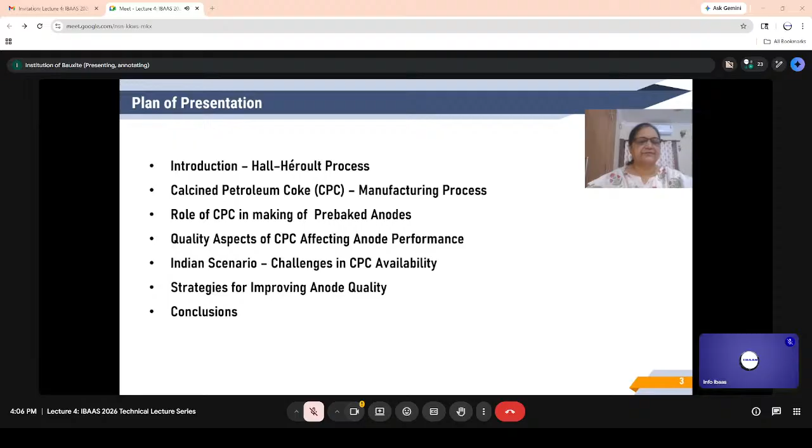As we all know, aluminium is produced through the Hall-Héroult process, where alumina is electrolytically reduced in molten cryolite. During this process, oxygen is released at the carbon anode and reacts with carbon to form carbon dioxide, while molten aluminium is deposited at the cathode.

The carbon anode plays a dual role. It acts as a current conductor and is continuously consumed during electrolysis.

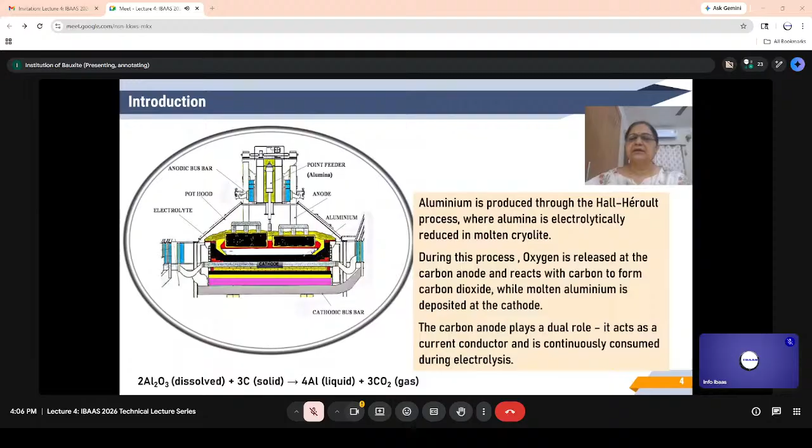Now, coming to the raw materials for pre-baked anodes, calcined petroleum coke or CPC is the most important raw material in anode production, contributing nearly 65% of the composition. The rest are coal tar pitch and recycled butts.

Properties of CPC directly influence anode quality and ultimately smelter performance. However, in recent years, CPC quality has been changing due to increased use of lower cost, high sulfur crude and the growing demand for aluminium.

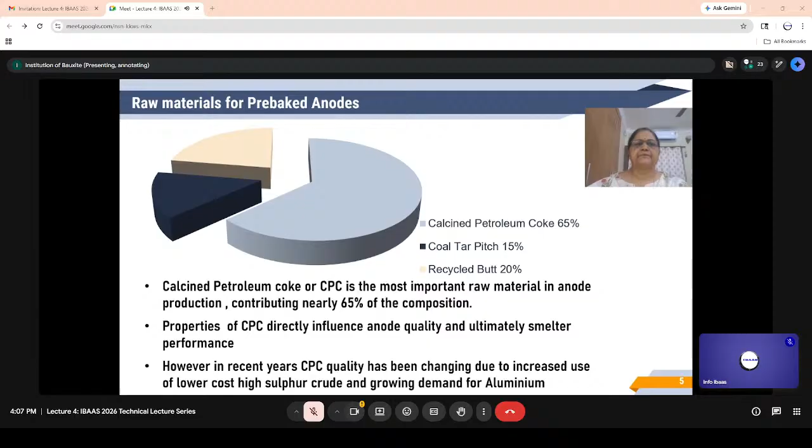Before we enter into the actual subject, I thought it's extremely important that we talk about the journey of calcined petroleum coke from a petroleum refinery.

Where it is not very much wanted, till it reaches the aluminium industry, where it becomes the most wanted, most needed raw material for anode making.

So the CPC starts its journey from the crude oil refining unit, where the residue is sent to a delayed coker.

This delayed coker produces RPC, that is raw petroleum coke, and this raw petroleum coke goes to a calciner, where you get calcined petroleum coke, which ultimately becomes the raw material for the aluminium industry.

And if we take around say 1 ton of crude oil for processing, we get around 40 kg of CPC for the aluminium industry.

The quality of this calcined petroleum coke is affected by choice of crude, initial refinery process steps, coking and calcining processes, and handling systems between the refinery, calciner, and final customer.

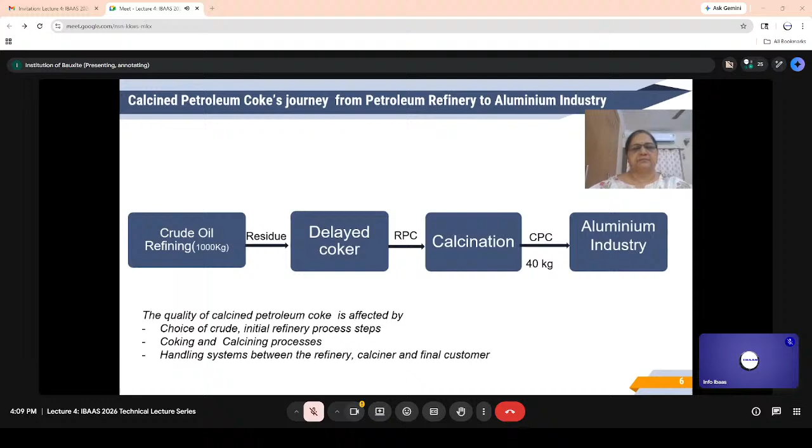So coming to the refining process, as we all know, the crude oil is refined by distillation processes, atmospheric and vacuum distillation, to give us valuable products which are of interest to the refiners.

These are of commercial application, that is gasoline, naphtha, kerosene, diesel fuel, and gas oil.

And the residue which is left out goes to the delayed coker, becoming the feedstock for the delayed coker, from where we get RPC. So the chemical properties of RPC, such as sulfur and metals, are directly related to crude oil quality.

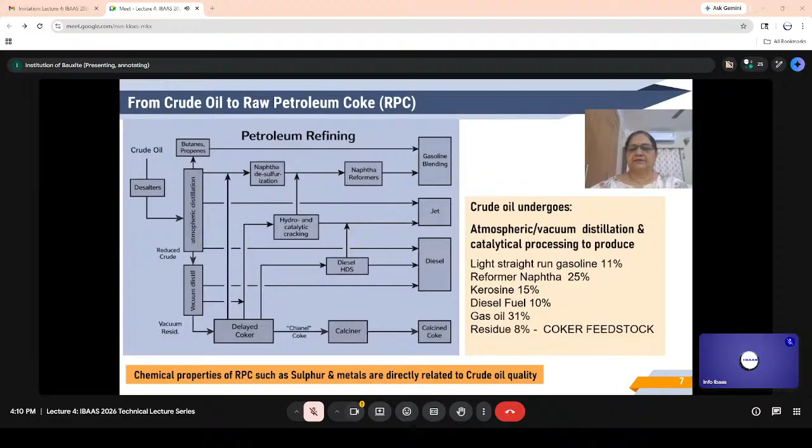Looking at the delayed coker, it converts low value residual oils into higher value lighter products. Final carbonization occurs in coke drums at higher temperature and pressure. The physical properties of RPC, such as volatile matter and moisture, are related to the operating variables of the delayed coker.

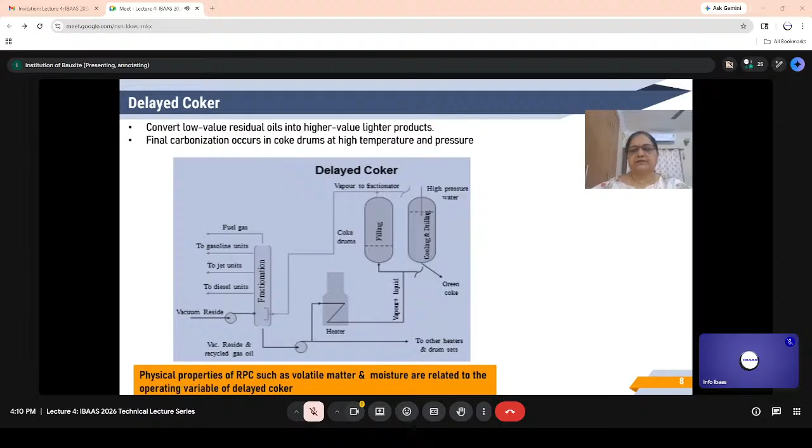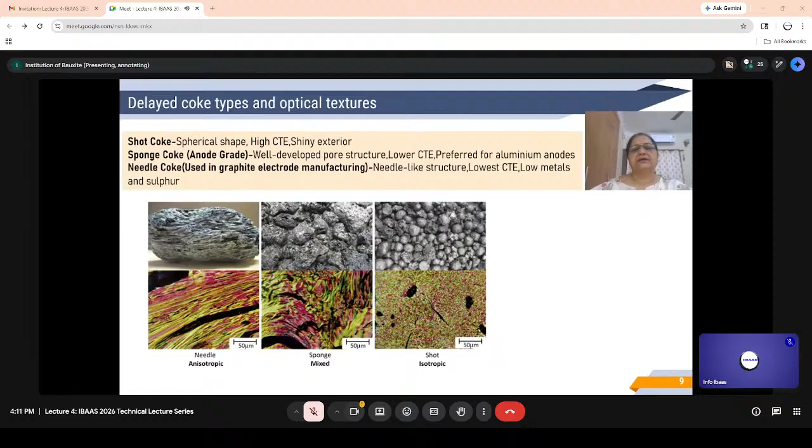We get three products out of the delayed coker. That is shot coke, which has high CTE and shiny exterior and is spherical in shape. We have sponge coke, that is anode grade coke. It has a well developed pore structure, lower CTE (coefficient of thermal expansion), and is preferred for aluminium anodes. Then needle coke, which goes for graphite electrode manufacturing. It has a needle-like structure, lowest CTE, and low metals and sulfur.

Now coming to the calcination process, where RPC is converted to CPC. This is a thermal treatment process at very high temperature, say 1250 degrees centigrade, where moisture and volatile matter are removed by heating. This increases the electrical conductivity and density of the RPC, making it more oxidation resistant and suitable for anode making. The calcination operation has a significant influence on CP coke quality. Cokes with substantially different volatile contents, both in quality and quantity, and different impurity levels should be calcined under different conditions. The methods of calcination are rotary kiln, which is most widely used, rotary hearth furnace, and vertical shaft kiln.

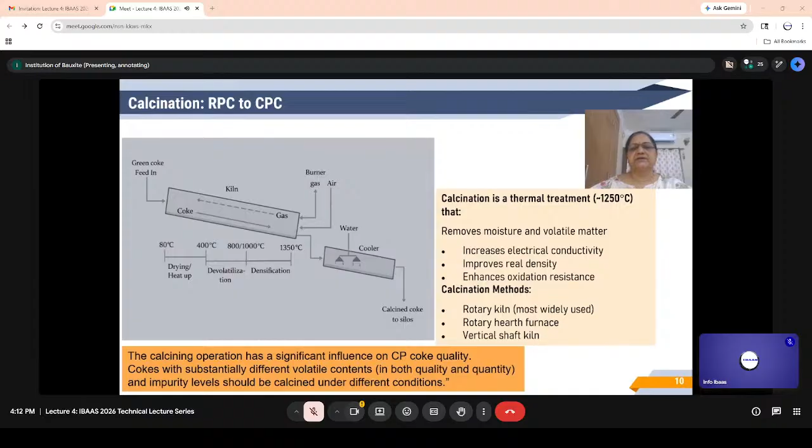When RPC converts to CPC, moisture gets removed, volatile matter gets removed, ash increases, and fixed carbon increases. Impurities change as per the operating variables of the calciner and the equipment. The real density and bulk density improve to higher values, the strength improves, and the apparent density also increases.

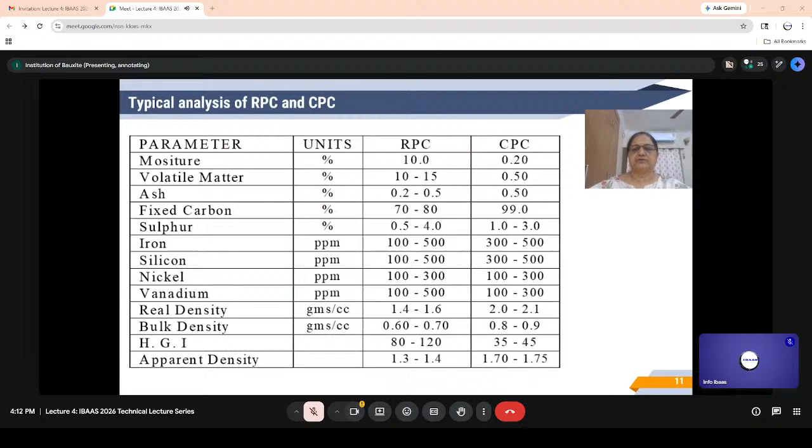Now the CP coke enters the carbon plant of the smelter plant, from where we make anodes. There are three stages of production of anodes: the green anode plant, the baked anode plant, and then the rodded anode shop.

I'll just briefly give you the process. The coke, upon reaching the carbon plant, is graded into different fractions, crushed and ground into fines to give the desired fractions of coarse, medium, and fines. It is also mixed with crushed spent anode butts, which come out from the electrolysis cell after consumption of the anodes. Then the dry aggregate is preheated and mixed with coal tar pitch at a particular temperature, say 150 to 170 degrees centigrade.

It is formed into green anodes, and then baked very slowly for a period of say 14 days, during which the pitch gets carbonized and reaches a temperature of 1050 to 1120 degrees centigrade. Now the baked anodes become suitable for the electrolytic operation, and then they are rodded and sent to the pot line.

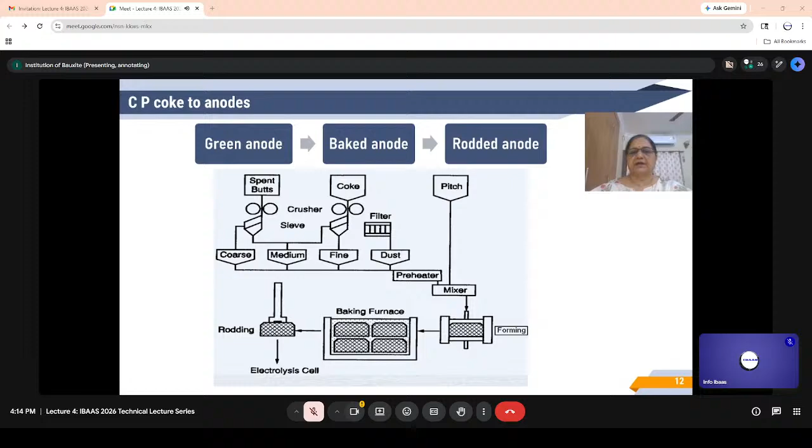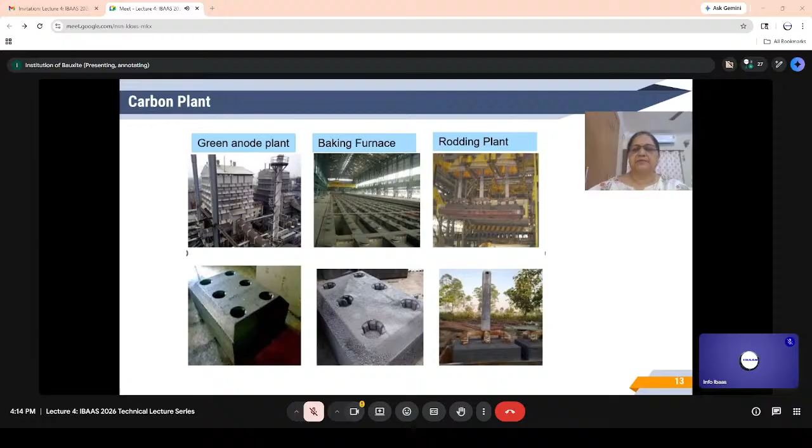In this slide, I've shown the picture of all three stages of anode making. Of course, this picture is from NALCO, so it will be different for different aluminium plants and aluminium smelter plants.

As we are talking about the anodes, it's also important to understand the anode consumption mechanism. From the overall reaction we all know, if we calculate the theoretical consumption of carbon from this equation by stoichiometry, it comes to around 334 kg of carbon to be consumed per ton of aluminium production. However, this value is always on the higher side, due first to current efficiency always being less than 100%, and also losses due to excess reactivities, dusting, breakages, etc. So we get a figure higher than 400, to 420 or 430 kg of carbon per ton of aluminium.

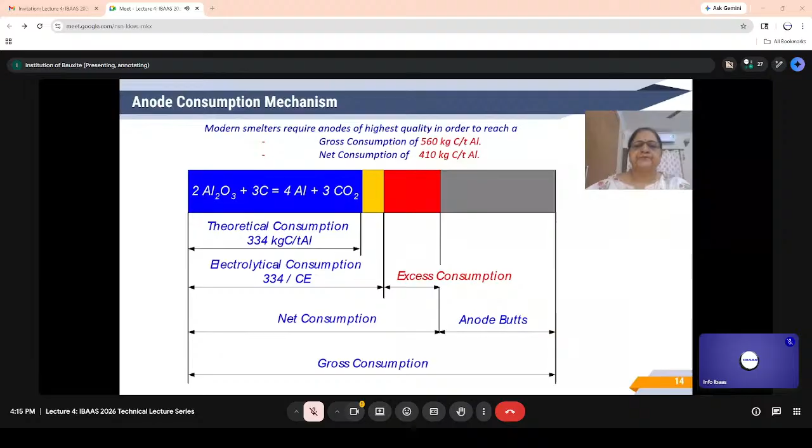If we look at the schematic mechanism, taking a single anode to see how this carbon gets consumed, this is due to electrochemical formation of CO2 from the overall reaction, and the formation of carbon monoxide due to a back reaction.

There is also air reactivity, which happens at the top of the anode at around 400 to 450 degrees centigrade, where oxygen from the air reacts with carbon to form carbon dioxide. And there is a back reaction from the carbon dioxide gas underneath the anode, again reacting with carbon to form carbon monoxide—that is called carboxy reactivity or CO2 reactivity. There is also preferential oxidation of the binder, and dusting also takes place inside the pot.

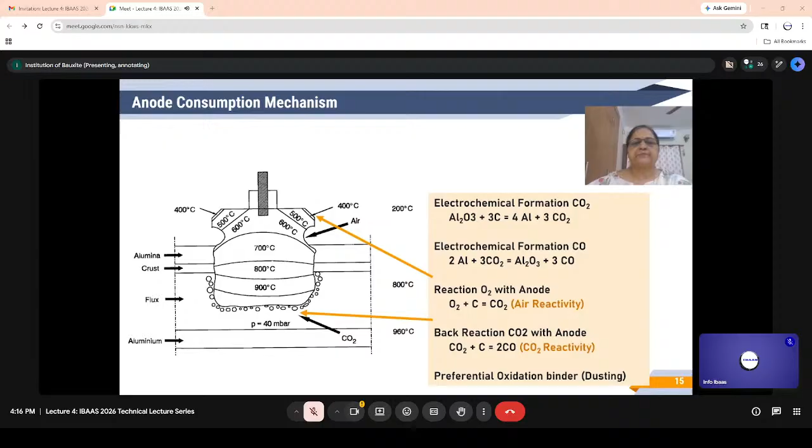So what do we look for in pre-baked anodes, what are the critical properties? These are high apparent density, high mechanical strength, low electrical resistivity, high thermal shock resistance, low chemical reactivity, and high chemical purity.

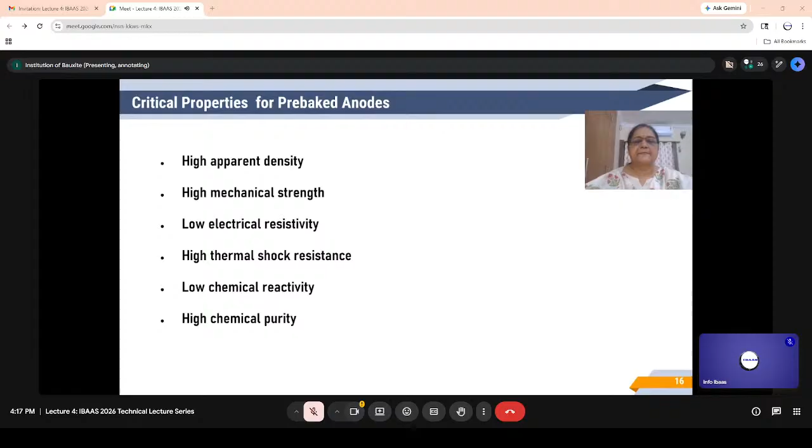These anodes are tested for specific properties, which gives us an idea of what kind of anodes we are using in the pots. This tells us about the apparent density, specific electrical resistance, flexural strength, compressive strength, coefficient of thermal expansion, fracture energy, thermal conductivity, real density, air permeability, and reactivity figures along with the impurities.

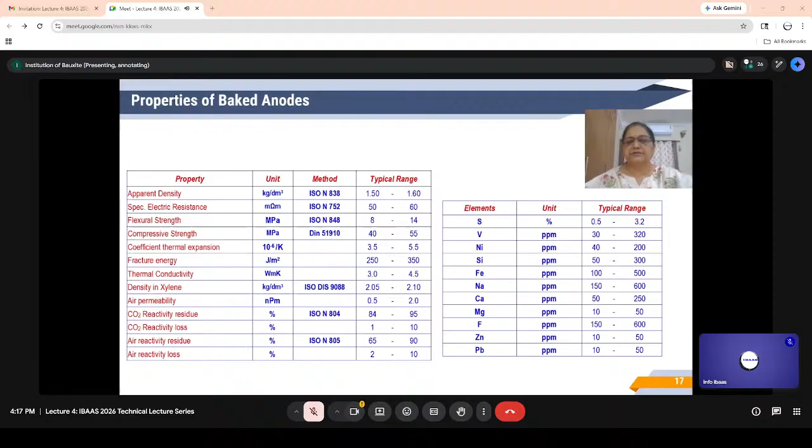Also, I wanted to share with you one theoretical equation of carbon consumption, where these anode properties are related to the net carbon consumption, along with some parameters like current efficiency and cell design, one cell factor depending on the design of the pots and bath temperature of the pot.

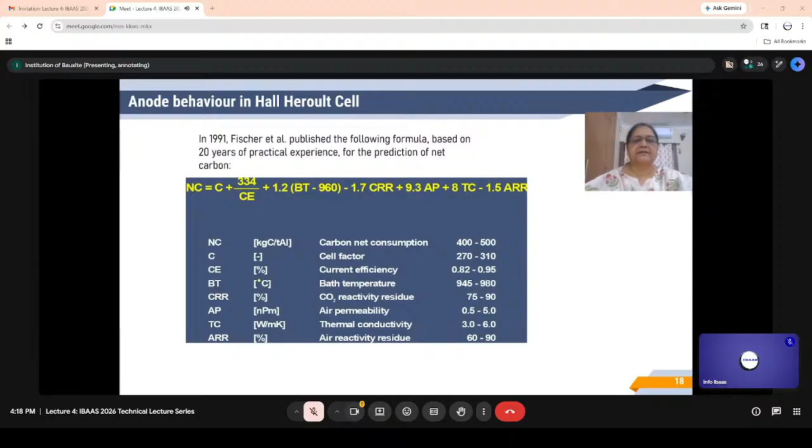Let us have a look at the quality aspects of calcined petroleum coke and their impact on anode quality. The properties tested for CPC are apparent density, real density, impurities, and reactivity figures. The apparent density affects the bulk density of anodes, and anode cycle is decided based on the baked anode density.

Real density indicates the calcination level of CPC, and baking level in anode making is adjusted accordingly. Sulfur affects the net carbon consumption and reactivity figures, and baking levels are adjusted for desulfurization. It also has environmental impact.

The impurities - iron, silicon, vanadium, nickel - all these lead to metal contamination, and especially vanadium leads to air reactivity. Sodium and calcium affect the reactivity figures. Size and grain stability are important as far as the structure of the anode is concerned.

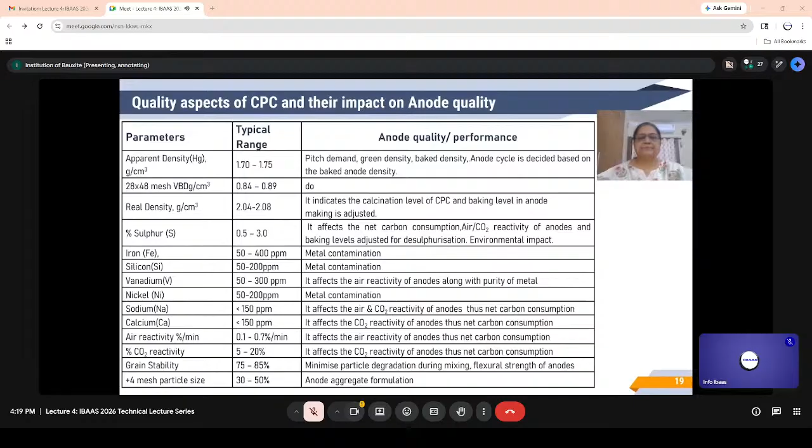So why and how is coke quality changing? Refineries on average are running more lower cost, high sulfur and heavier sour crudes, which directly impact coke quality. A significant increase in aluminium production and demand for coke is not being matched by growth in traditional quality anode grade cokes.

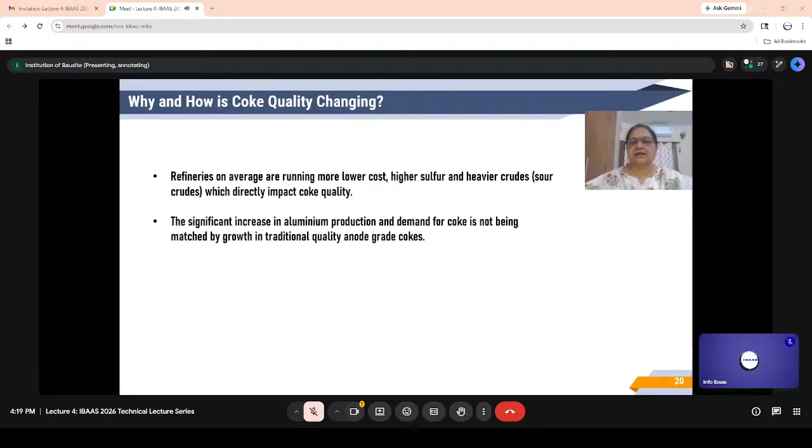If we look at the Indian scenario, today the aluminum capacity in India is 4.1 million tons. It is projected to be 8 million tons, so the CPC requirement is going to double from the current 1.3 million tons to 2.6 million tons. But the challenges are limited availability of low sulfur RPC - only 5 out of 23 refineries produce anode grade RPC, so there's a domestic supply gap.

The above figures may not be up to date, it's an old slide.

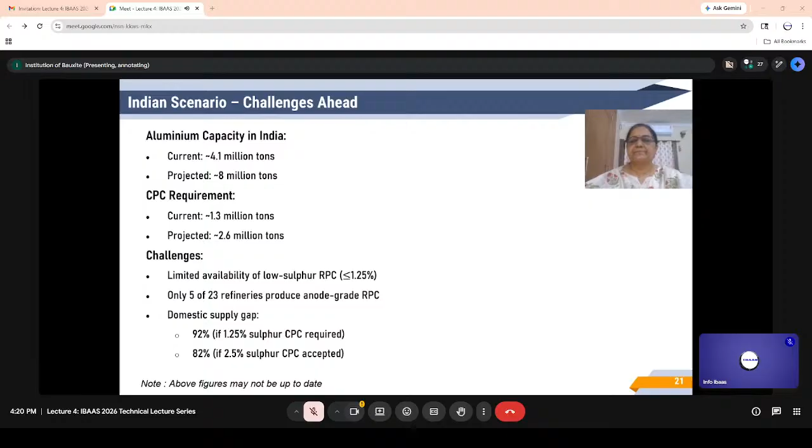Now let us see the changes seen in CPC quality and the impact on anode quality and smelter performance. There are four risks which I'll be explaining. First is decrease in coke density due to crude changes and higher volatile matters. Cokes with more isotropic structure may be used, while shot cokes may be blended. Increased impurity levels, particularly vanadium, and sulfur levels of high sulfur cokes used in blends will increase. In the next slides, I'll explain each of these risks in detail and what are the impacts on anode quality.

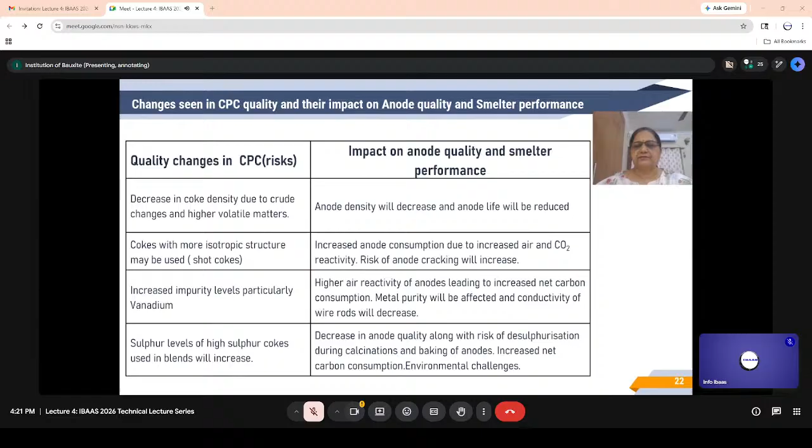First, let us have a look at the coke bulk density. If it decreases, it has a direct impact on bulk anode density. Anode shift life is going to be affected, increasing anode production cost. Air permeability of anodes will increase, leading to increased carbon consumption, and specific electrical resistance will also increase, leading to increased power consumption.

Here I have shown a few graphs where you can see the bulk density of cokes is directly related to the apparent density of anodes, and also if the bulk density decreases, the air permeability of anodes also increases.

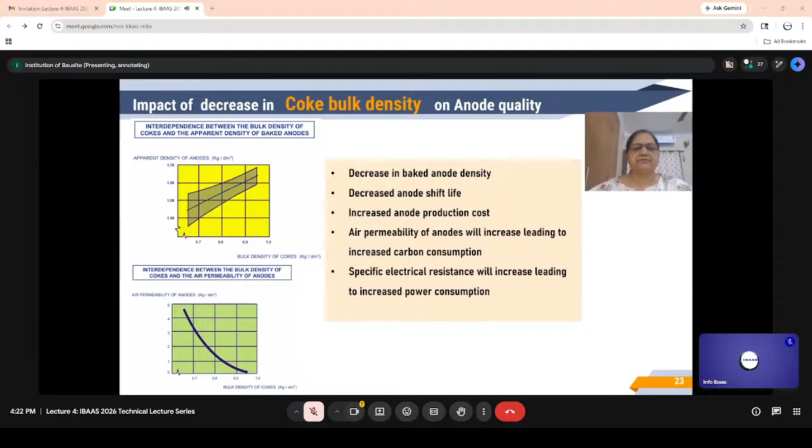The presence of shot cokes in CP coke matrix will lead to production of anodes with higher CT values and lower flexural strength, and possibility of development of anode cracks during electrolysis.

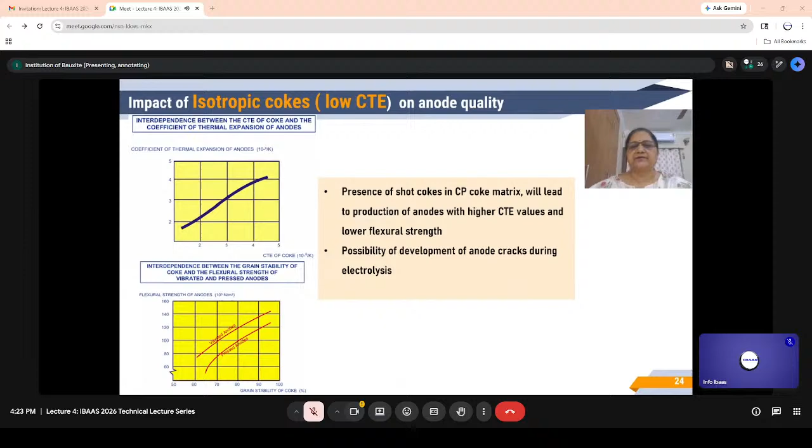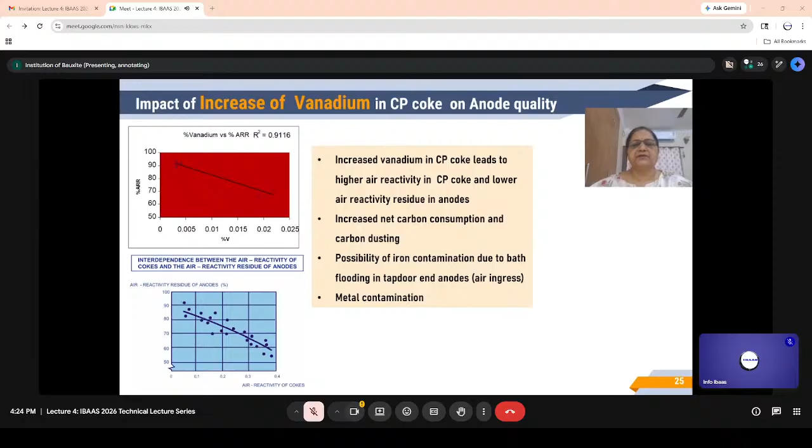Now let us see the impact of increase of sulfur in CP coke on anode quality. Increased sulfur leads to increased net carbon consumption due to net loss of sulfur. As you can see from these graphs, anodes made out of high sulfur coke start desulfurization at around 1100 degrees centigrade.

So desulfurization leads to increased air reactivity, increased permeability, and increased net carbon consumption. It also poses environmental challenges in terms of emission of SO2 gas. The only positive thing we notice is the CO2 reactivity residue shows better results when the sulfur is on the higher side in CP coke. But again, the effect of recycled sulfur on electrolytic bath and current efficiency needs to be assessed.

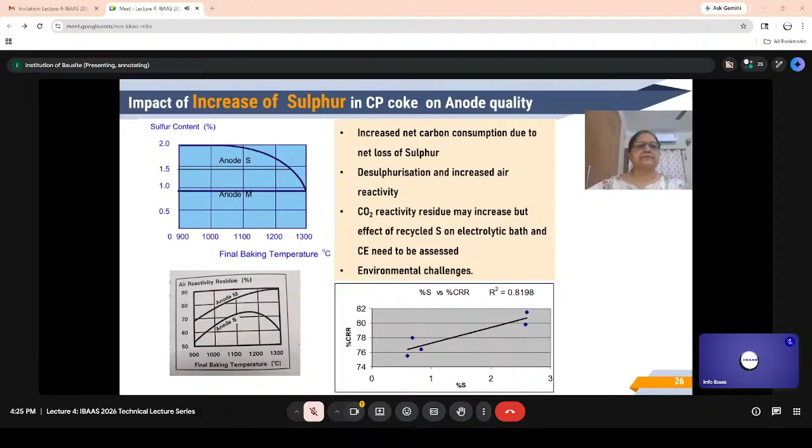The impact of increase of sulfur in CP coke on anode consumption and current efficiency has been studied in detail, and it has been published in a recent publication in 2023. The results show that when the sulfur content in anodes increases, the carbon consumption also increases, and the current efficiency gets affected, showing a downturn when sulfur in anodes is on the higher side.

So the results have shown that current efficiency lowers by around 1.3% per 1 weight percent of sulfur, and carbon consumption increases by 6.1% per 1 weight percent of sulfur for pre-baked anodes.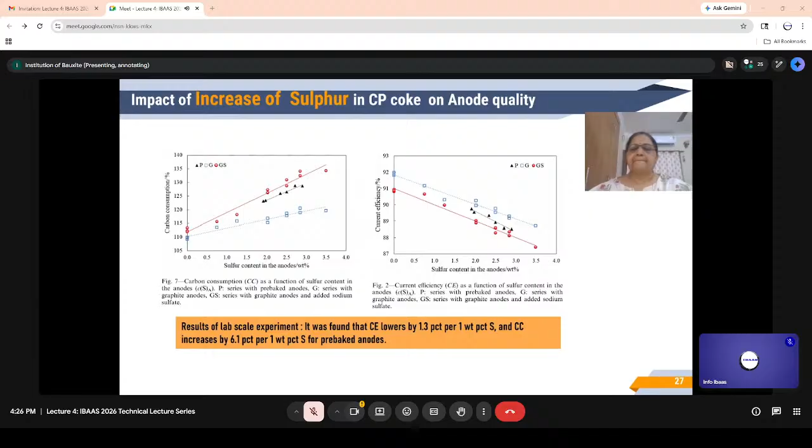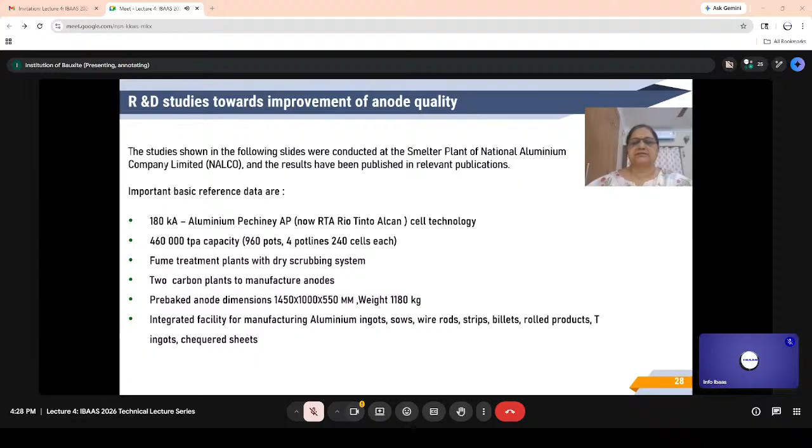The CP coke taken for the R&D studies was mainly of two types: one of higher density with lower impurities, and another of lower density with higher metallics, higher sulfur, and also higher reactivity.

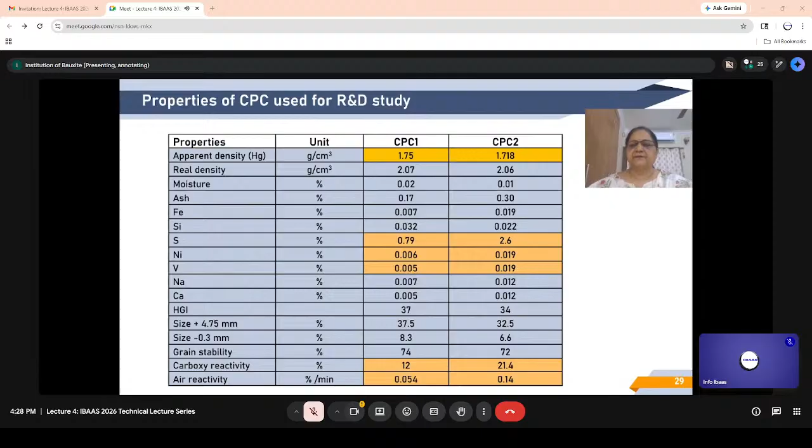The first experiment carried out was to see the effect of blending on the resultant anode quality. We blended 30 to 40% of the premium, higher grade coke, all fractions, with the lower grade coke, and anodes were made. All these experiments were carried out in R&D carbon bench scale equipment supplied by R&D Carbon Switzerland. These bench scale experiments showed considerable improvement in anode density, green density, and bake density of the blended anodes.

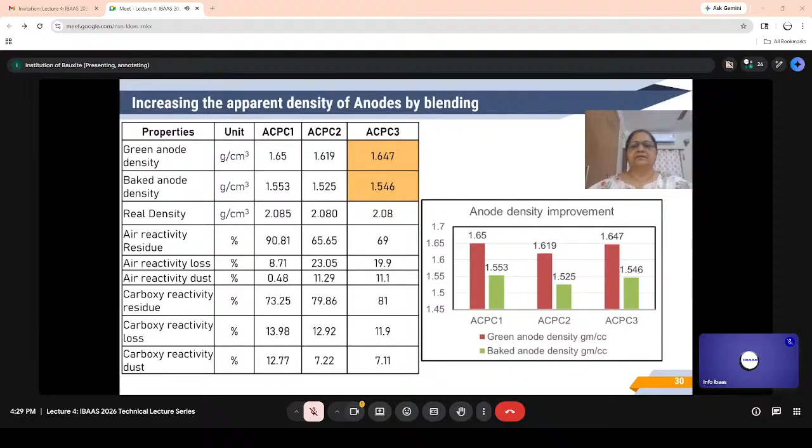The second experiment was to see how to improve the reactivity figures. This is difficult to implement in the plant with the present setup, but we still tried to see if the whole fines fraction could be made from the premium grade coke, with the other fractions being of the lower density coke. Because the fines fraction is the most reactive part of the dry aggregate, using premium grade fines in place of lower grade coke had the expected effect.

The reactivity residue increased from 65 to 85%, and CO2 reactivity also increased from 79 to 84%.

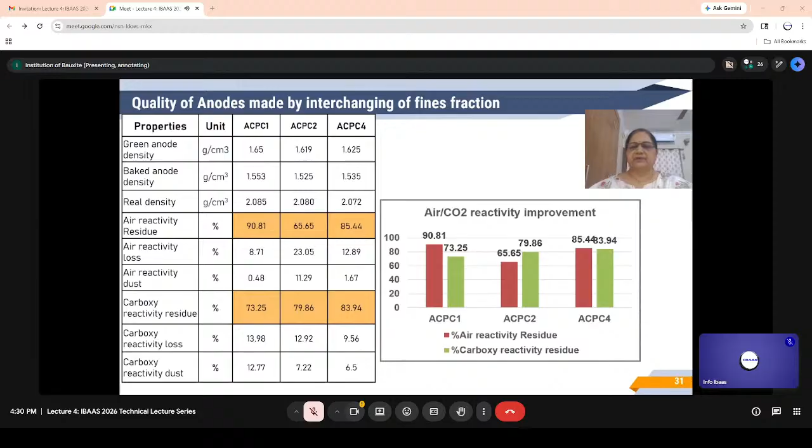The next experiment was carried out again with respect to fines. Minus 200 mesh was operated at 68 to 70%, and that was increased to around 80%. Accordingly, the Blaine number was measured and found to increase from 3500 to 4400. As you can see, as you increase the Blaine number, it also increases the green density and baked anode density.

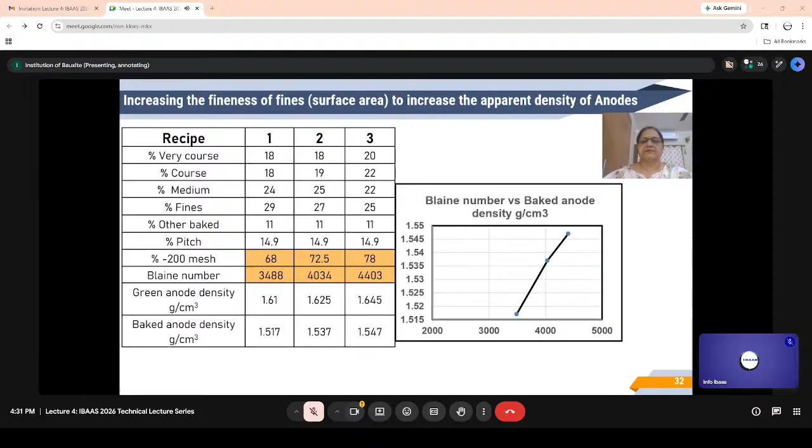The mixing temperature was also increased in the bench scale plant experiments. We tried to make anodes at different mixing temperatures, and we could see that the higher the mixing temperature, the better the density of anodes. This is natural because the pitch is able to ingress into all the pores of the coke, giving a very good structure in terms of density.

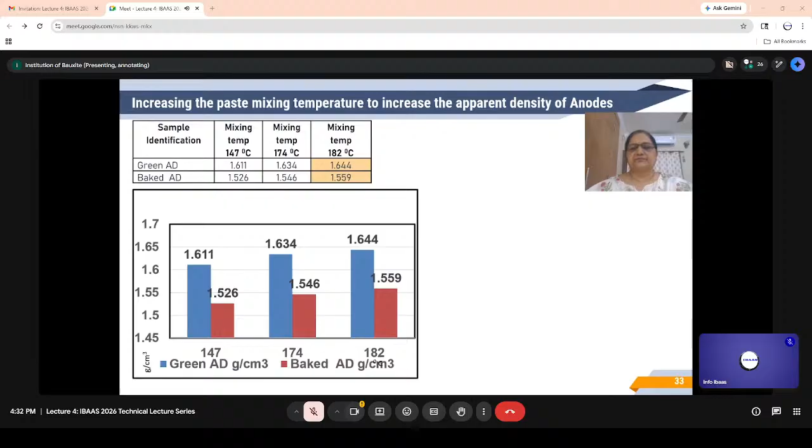Then, to mitigate the effect of reactivity issues, mainly attacking the air reactivity of anodes, we did extensive studies trying various additives to see their effect on decreasing air reactivity losses. We found that boric acid is one of the inhibitors which gave very satisfactory results in lab scale, pilot scale, and limited plant scale trials.

We then implemented this in the whole plant, and now in both carbon plants this process is already in use and in operation. The air reactivity residue before addition of boric acid used to be around 62 to 63%, and after we started adding it, it has come to more than 85%, so the air reactivity dust is decreased. Of course, when adding boric acid, there has to be some increase in boron content, so that needs to be monitored. There was no effect on average metal purity.

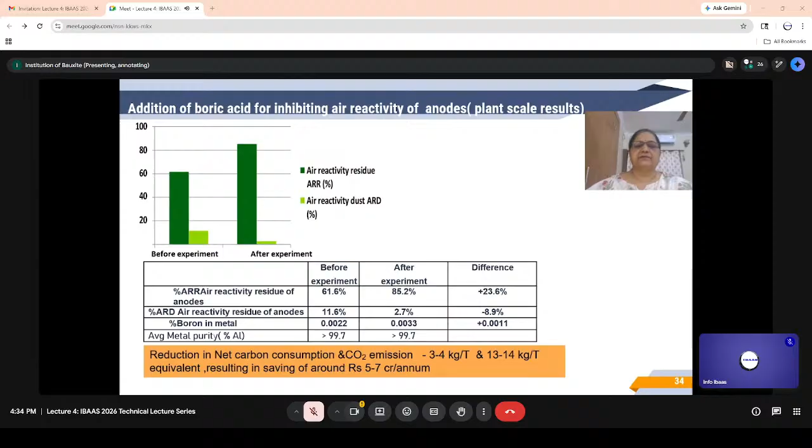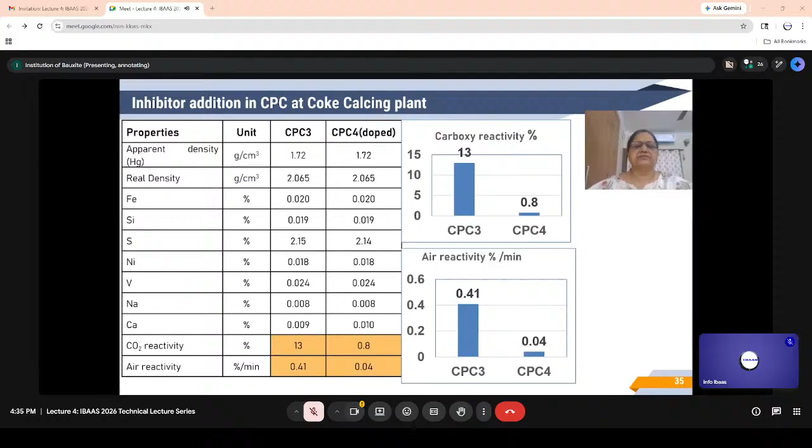Another experiment was carried out at the CP coke calcining plant, where we added this boric acid powder at the discharge end of the CP coke while it was still in hot condition. We just mixed it physically and took out that coke. When we analyzed the CO2 reactivity and air reactivity, they had decreased to a considerable extent. This coke was again used for bench scale experiments to make anodes and find out the effect on the reactivity figures of the anodes, and there was considerable improvement in air reactivity residue and CO2 reactivity residue.

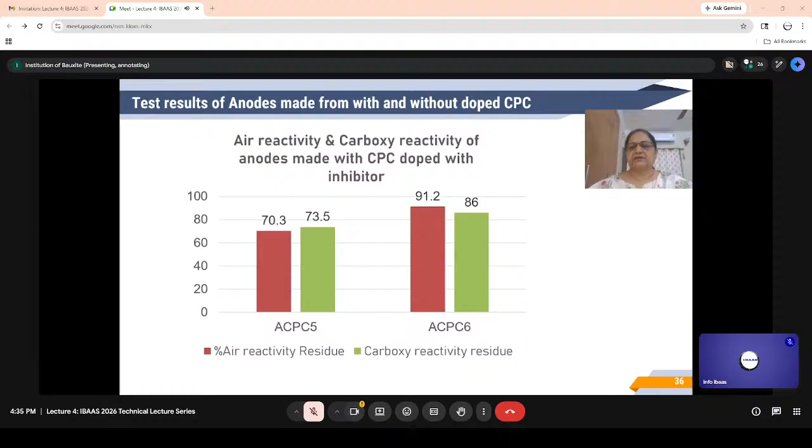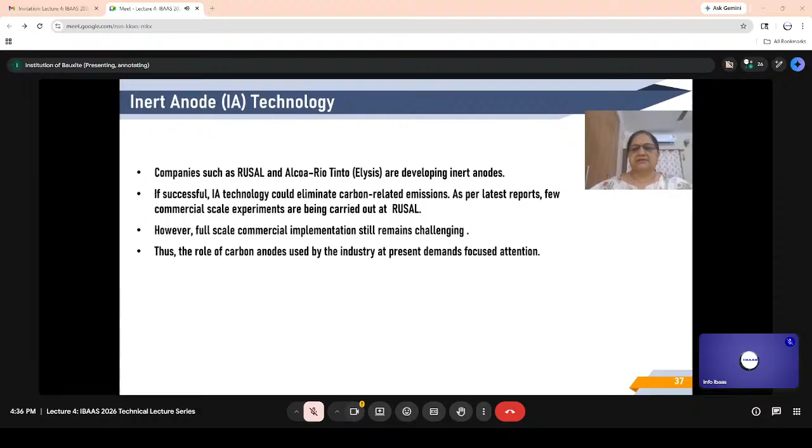Before I conclude my lecture, I would like to share one slide on inert anode technology. As you all know, companies such as Rusal, Alcoa, and Rio Tinto are developing inert anodes. If successful, this technology could eliminate carbon-related emissions. As per latest reports, commercial scale experiments are being carried out at Rusal; however, full-scale commercial implementation still remains challenging. Thus, the role of carbon anodes used by the industry at present demands focused attention. Here I have given the references.

Now I will conclude my lecture by sharing some strategies to mitigate the impact of quality changes in CPC. These suggestions are not exhaustive, and maybe other better suggestions may come up, but these are my views based on my experience. There will be two slides for these strategies: one for the calciner, coke calciner end, and another for the smelter plant.

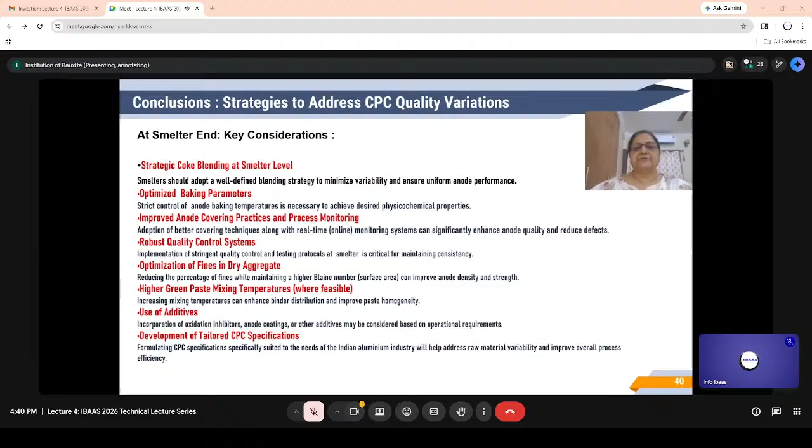Thank you for your attention. Thank you all.